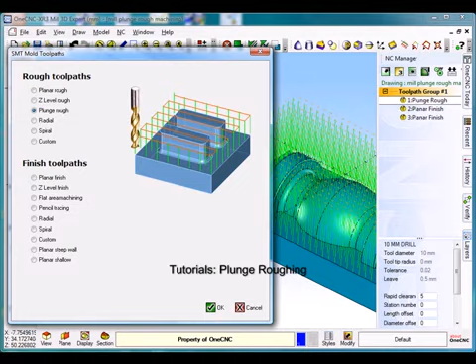Hello everybody, welcome to the OneCNC tutorial on plunge roughing.

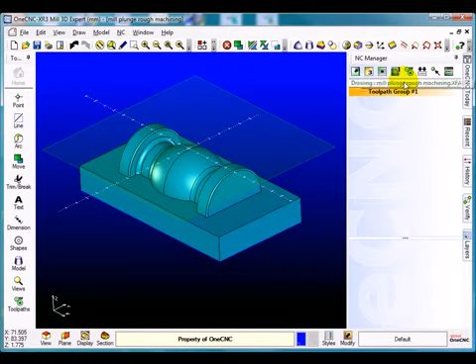As you can see on the screen, I've got myself a model laid in position, and what I'm going to do is open the NC manager. I know it's open there, but I'll just open it again, lock it in position, and what I'm going to do is create model toolpath, select plane A and Z level, and the option I'm going to select is plunge

roughing. What this is going to do is rough it out, but like in a drilling operation. So you could have a slot drill in there, or a drill, whichever you wanted, and all it's going to do is just go down, plunge, step over distance, and plunge down again, step over, plunge down again, step over, and so on, all the way around the 3D form. So we'll select plunge roughing, select OK.

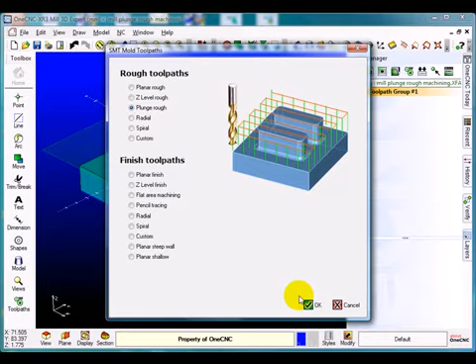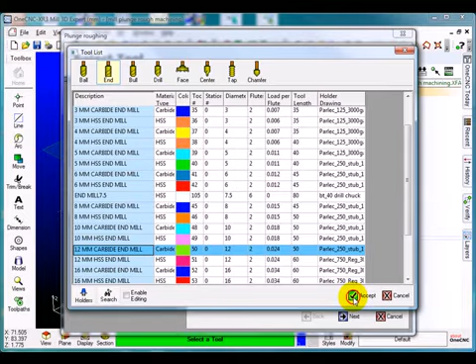What I'll do is pick myself a tool. So I'm going to pick myself a 12mm end mill, 12mm. Let's go down, accept. Tool number 1, spindle speed 2000, plunging 200. Select next. And the first thing it's going to ask me for is my rapid plane and my initial plane and the retract plane.

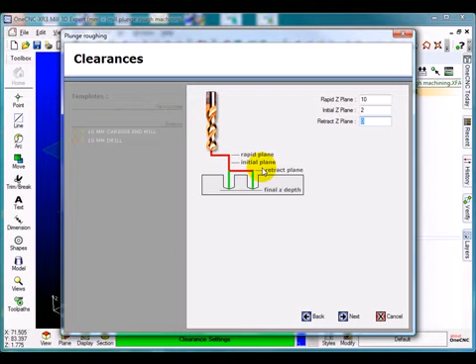I'll put my rapid plane at 10, initial plane I'll just put that at 2, and I'll put the retract plane to where I want it to come back to, 1. Select next. I'm just going to do a standard. You can peck it, you can dwell if you want, but I'll just put it as a standard. Select next, and this is where we're doing the plunge method. Whether we're doing manual or conventional, we're doing manual at the moment.

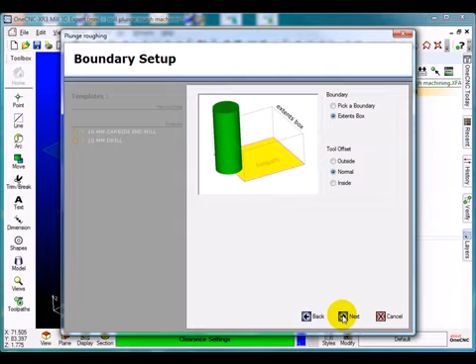And the step over, well, I'm using a 12mm cutter, so I'll step over half of it and step over half again. So that's my X step over and my Y step over. Decide what I'm leaving on for finishing. I could be leaving a mil on there, and I'll bring the tolerance back because we're only roughing out at the moment. Select next, extents box, normal, next, click on there, show preview.

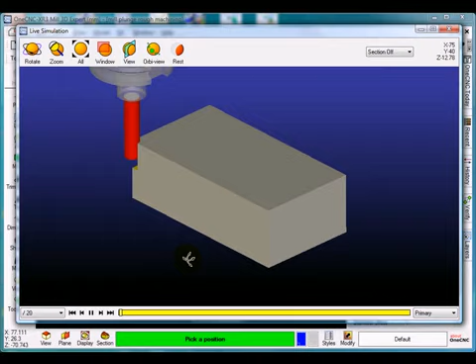I'll put that at 0, top of the job, 1, and select finish, and you can see it's created that toolpath on there. So right click, simulate. I'm going to pick a boundary, minus 48, select OK. This is the boundary, right click, and as you can see it's starting to plunge straight in, over, and then plunge again using 50% of the tool.

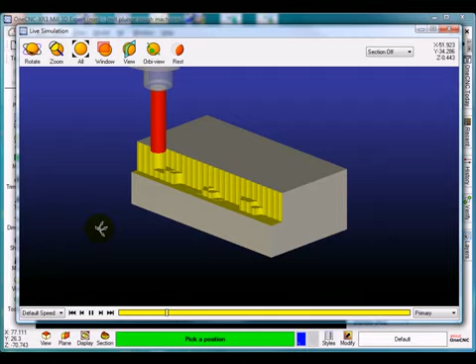Can you see it? Let's just speed it up a little bit. And then stepping back the other way. Speed it up to default speed, and you can see where it's picking up the form. Step over again, and stepping over again. And you can see it's roughing out around the detail. So we'll let it finish it.

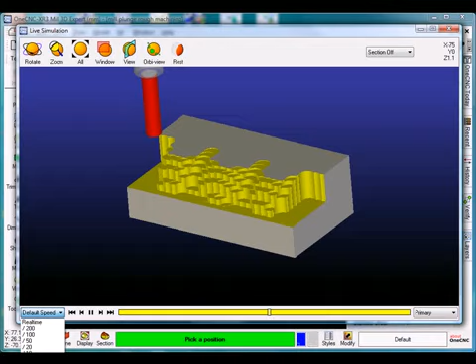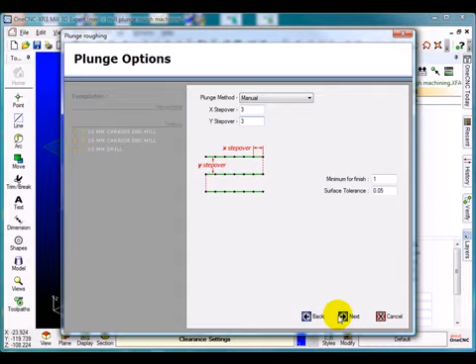Okay, you can see it's plunge roughed out that. So if I go into there and just edit the operation, select next, next, next, and I could put 3 there by 3. Select next, next, finished. Right click, simulate, select OK, left click, right click, and you can see you've got a finer step over as you're going around your form.

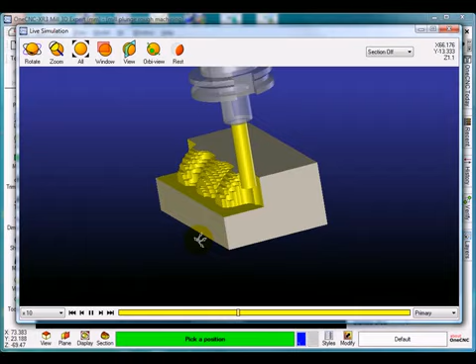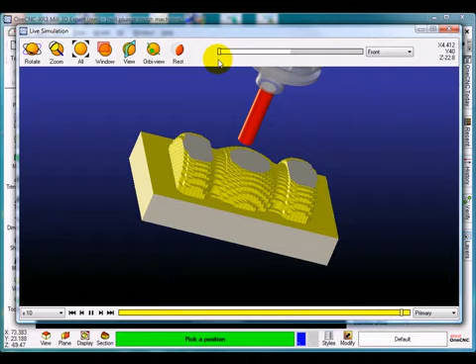You can still section through it and everything you wanted to do. Just turn that sectioning off, and you can see we've plunge roughed that out now. So if you want to do plunge roughing in OneCNC, that's how we do it.